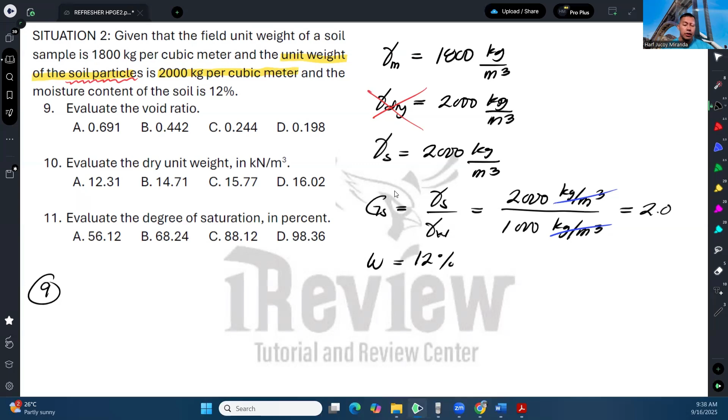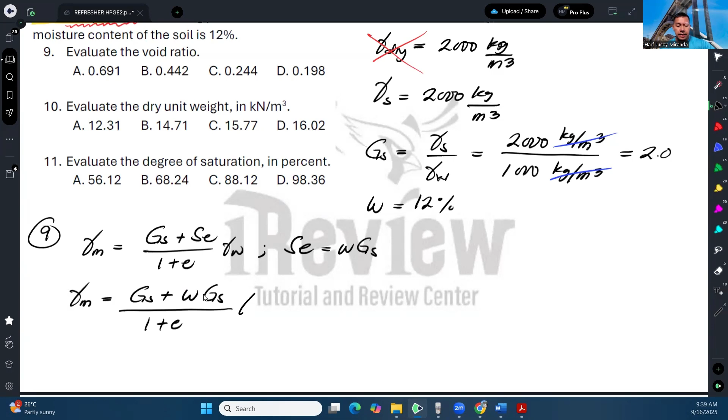So, question, what is the void ratio? So, pinapahanap yung void ratio. Para makompute yun, syempre, kailangan alam natin mga formula. Una, yung moist unit weight can be calculated as GS plus SE over 1 plus E times gamma of water. However, wala naman tayong S. Kaya, alternatively, we can write yung SE na yan to be equal to WGS. So, we can write gamma moist is equal to GS plus water content GS over 1 plus E times gamma of water. And from here, kapag sinubstitute natin lahat ng given, we can solve for E. So, ito ay 1,800. Ito ay 2 plus 0.12 times 2 over 1 plus E.

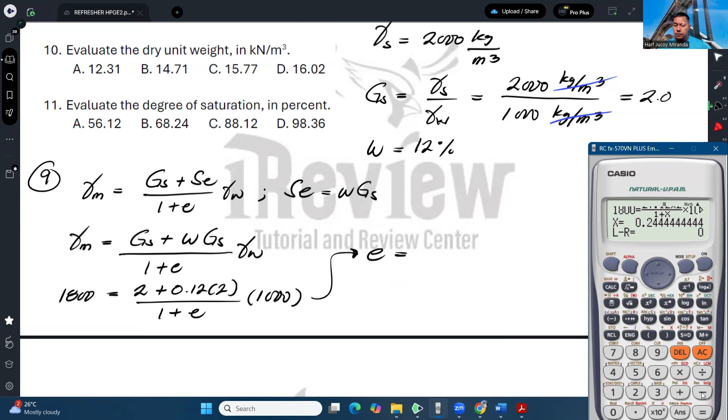And then again, be careful. Kung ano yung units nito, yun din dapat yung units nito. So dahil ito ay kilogram per cubic meter, yung gagamitin ulit natin na gamma ng water ay naka-kilogram per cubic meter din dapat, which is 1,000. And from here, we should be able to calculate for the void ratio. Okay, and that gives us 0.244. And that's our answer for the first question.

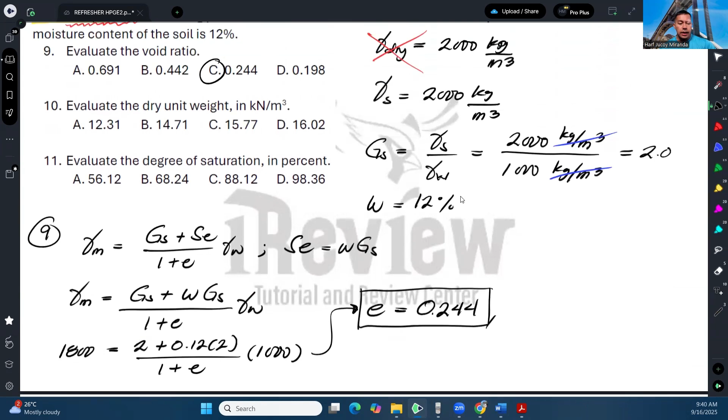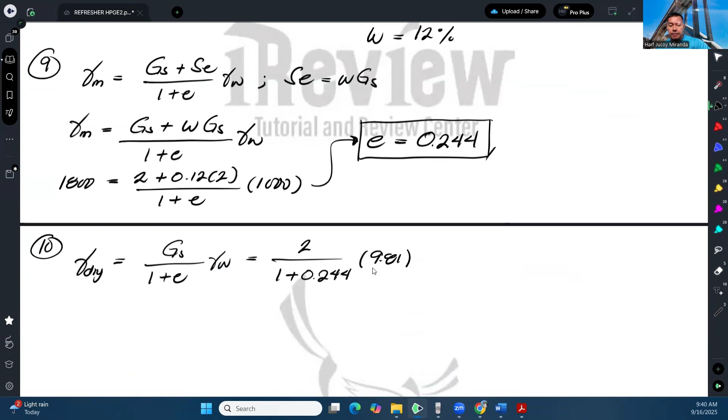As for the next question, evaluate the dry unit weight. So, pinapahanap yung gamma dry. Para masagot, you can make use of the formula GS over 1 plus E gamma water. Total, meron ka ng E. So, pag ganyan, direct substitution na lang. 2 over 1 plus 0.244 times. So, dito, ang gusto ni problem ay naka-kilonewton naman. So, yung gamma ng water na gagamitin is 9.81 na, para ang magiging sagot mo kagad ay naka-kilonewton.

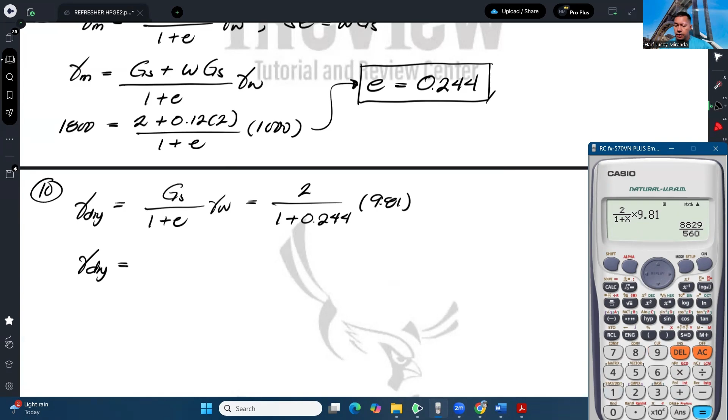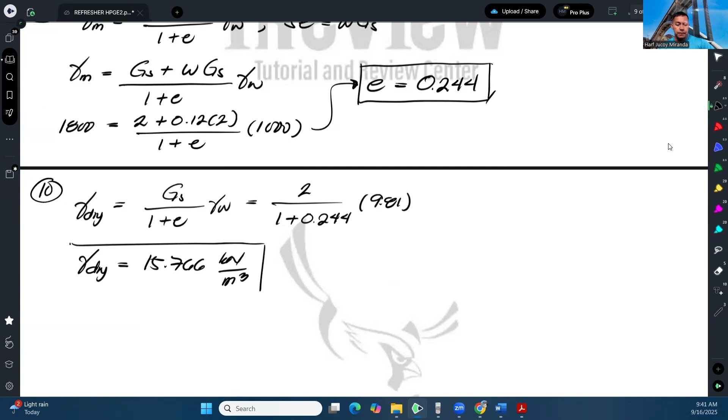Okay, so we have 2 over 1 plus the void ratio. And that gives us 15.766. Yan, kilonewton per cubic meter na yan. Or alternatively, we can also use this formula. May relationship kasi yung gamma dry sa gamma moist. And that is gamma moist over 1 plus moisture content. So meron tayong ganitong formula.

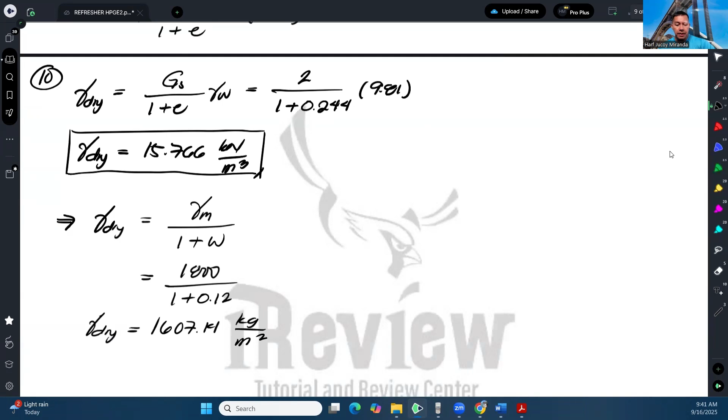Yung gamma moist na given is 1,800 kilogram, over 1 plus 12%. So, lalabas na gamma dry ay 1,607.14. Yun nga lang, kilogram per cubic meter pa lang to. So, if you want this to be converted into kilonewton, we will need to multiply 9.81 meter per second squared para ito maging newton na. 'Di ba? Kilogram meters per second squared.

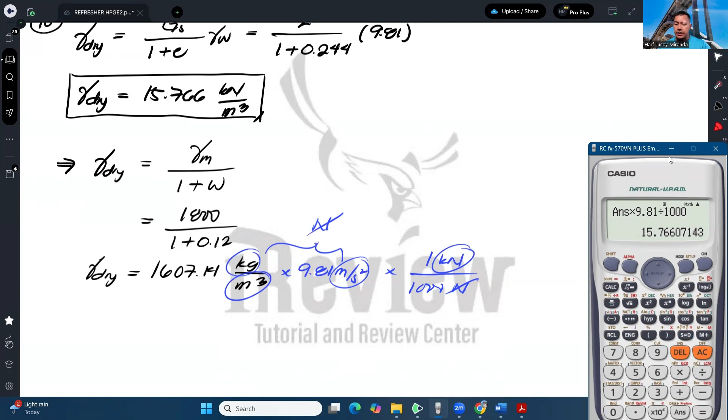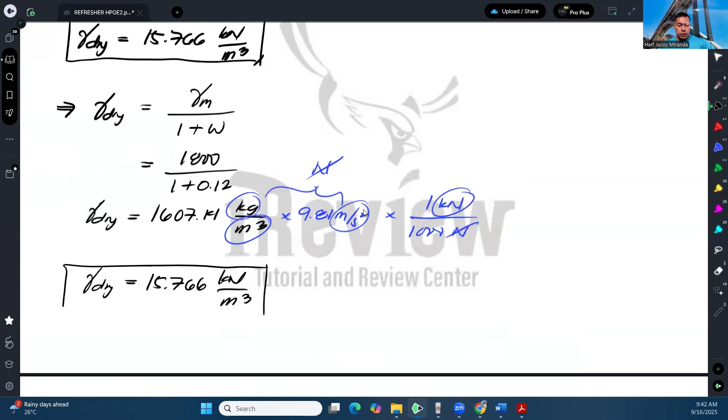Tapos para maging kilonewton, mag-multiply tayo na 1 kilonewton is equivalent to 1,000 newton, para magka-cancel naman to. Ang maiiwan ay kilonewton per cubic meter. So, mag-multiply tayo ng 9.81, divide naman natin ng 1,000. And as you can see here, you will get the same exact answer. So, parehas lang yun. So, you can also use that. Ibig sabihin, pwede nyo masolve tong number 10 nang hindi pa nasa-solve yung void ratio.

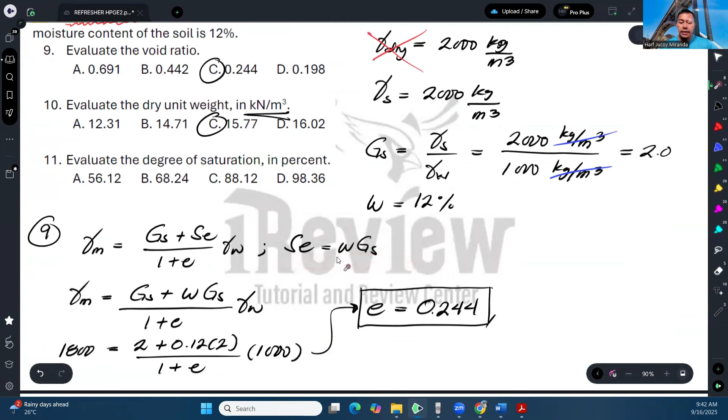And then last, evaluate the degree of saturation. So, dito, we will just utilize this formula. Kasi meron ka na nito lahat: W, GS, pati E. So, yung S na lang isi-solve mo. So, for number 11, S is equal to WGS divided by E. So, that is 0.12 times 2 over 0.244. So our degree of saturation would be 0.9818.

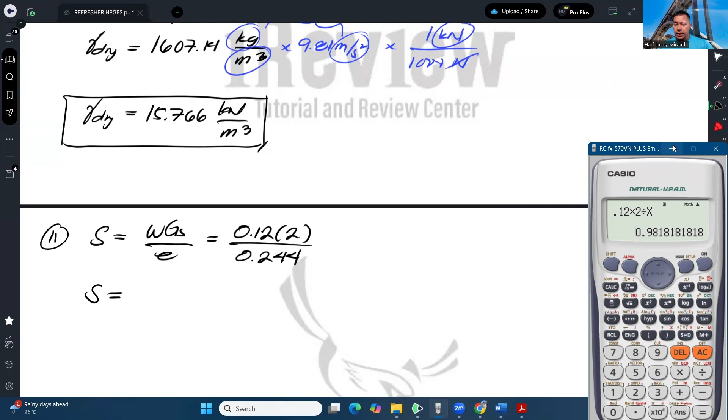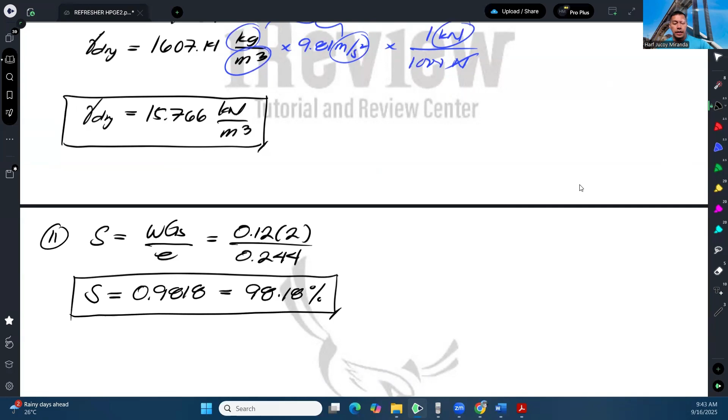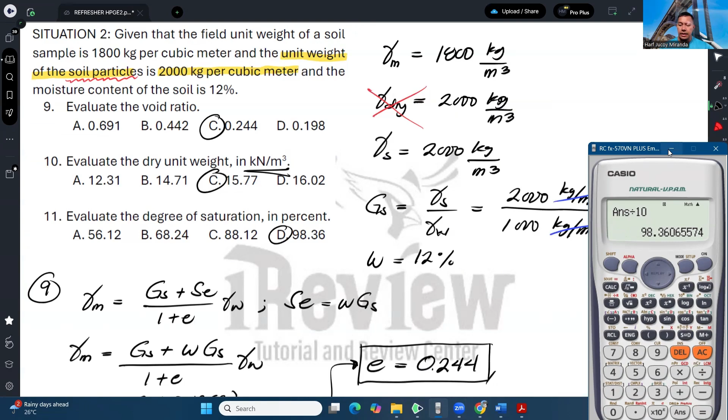Or that is also 98.18%. So may konting discrepancy lang sa choices kasi hindi tayo nag-round off sa computation natin. Pero kung sakali nag-round off tayo, yung E hindi natin inexact, ginawa lang natin 0.244, lalabas dyan 98.36%. So ito pa rin.